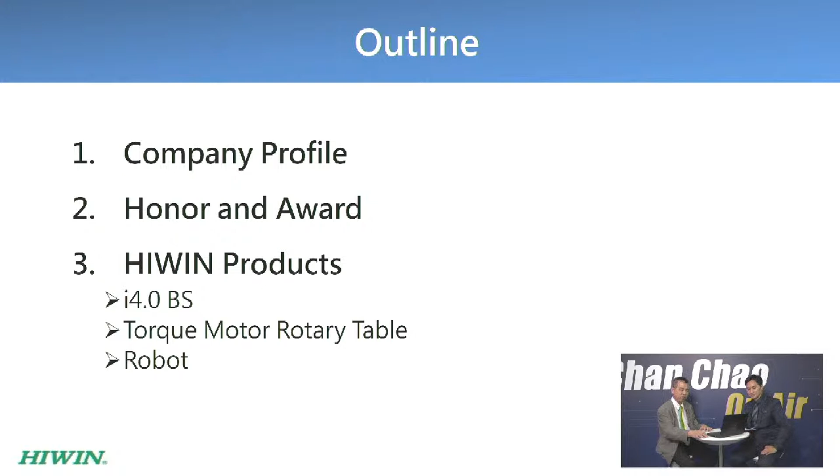I will focus on the product of HIWIN's Intelligent 4.0 ball screw, torque motor, rotating table, and the robot.

In the HIWIN Technology Group we have 5 companies: HIWIN Technology for mechanical components, HIWIN Microsystem manufacturing electrical components, Matrix - a more than 100-year-old company in the UK making grinding machines, Mega-Fabs in Israel which is the R&D center for microsystem products, and another company, Etherbright, which produces CIGS solar panels.

HIWIN is the motion control global leader for both ball screw and linear guideways, which are key components for intelligent automation and the robotic industry. HIWIN offers products from mechanical components to module products, such as robot reducers for robot applications, torque motor rotating tables, intelligent ball screws, i4.0 ball screws, for advanced machine tools and all kinds of industry, robot and automation.

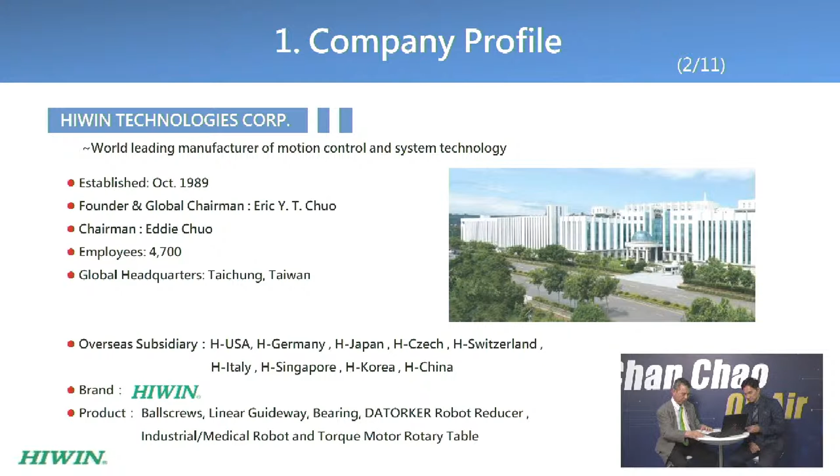Also for the semiconductor industry, which includes single-axis robot, 6-axis robot, SCARA robot, wafer robot, and delta robot. HIWIN is the best partner for Industry 4.0 in smart manufacturing.

Next, HIWIN Microsystem provides electrical component solutions. The main products consist of servo motor and drive, torque motors, linear actuators, position measuring systems, XY stages, and inverters. HIWIN is the only company in the world which can offer a mechanical and electrical total solution to global customers.

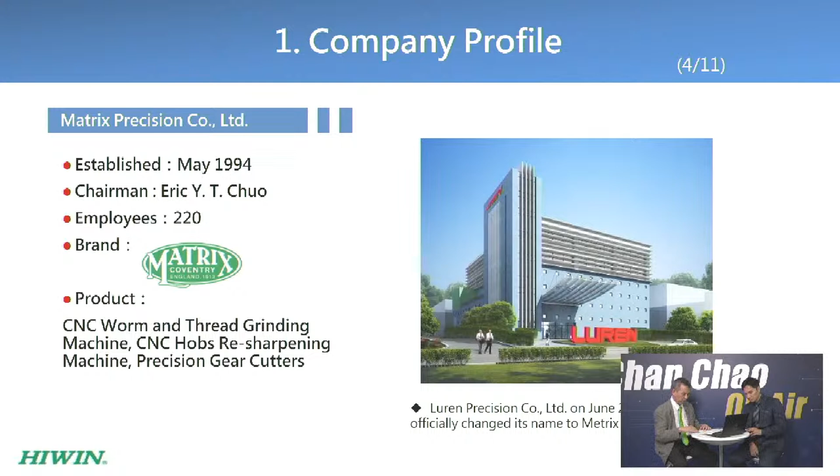Next is Matrix Precision in Taiwan, which produces CNC thread grinding machines. Next is Etherbright, which produces solar panels.

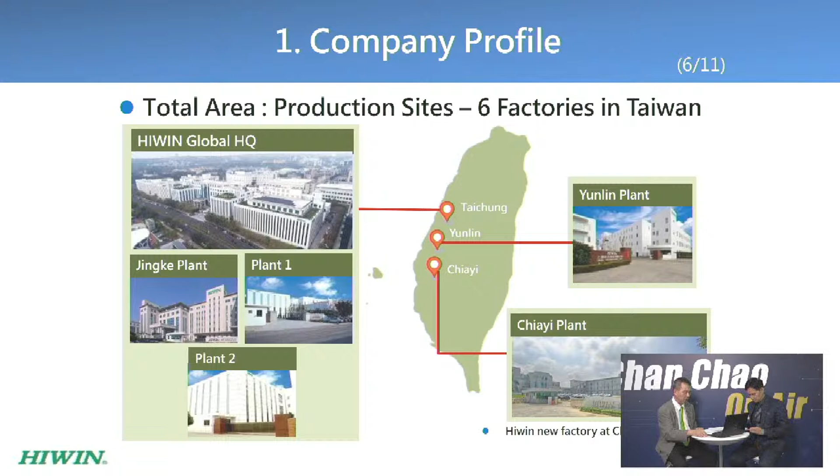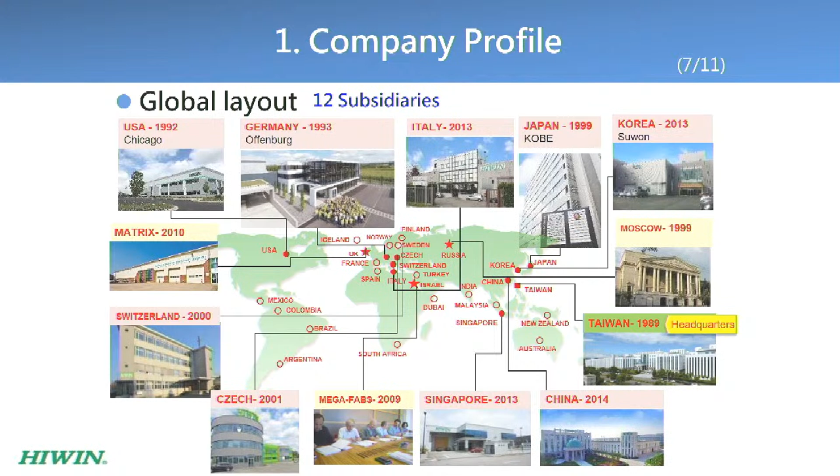All of HIWIN's factories are located in Taiwan. We have 6 factories and all key components are manufactured in Taiwan. HIWIN has a global network with 12 subsidiaries and distribution channels in more than 50 countries.

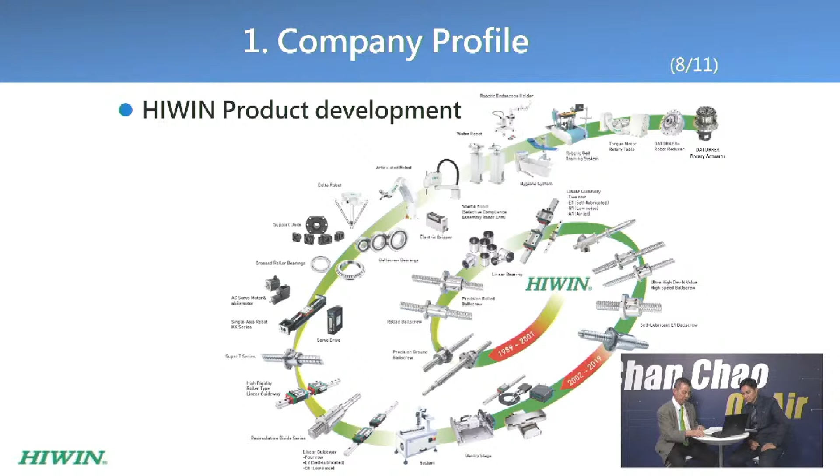Here is our product map. We started by manufacturing linear motion products, ball screws, and linear guideways. HIWIN manufactures all of its own key components. We provide integrated module products for the industry, automation, and smart manufacturing industries, such as industrial and medical robots and torque motor rotary tables.

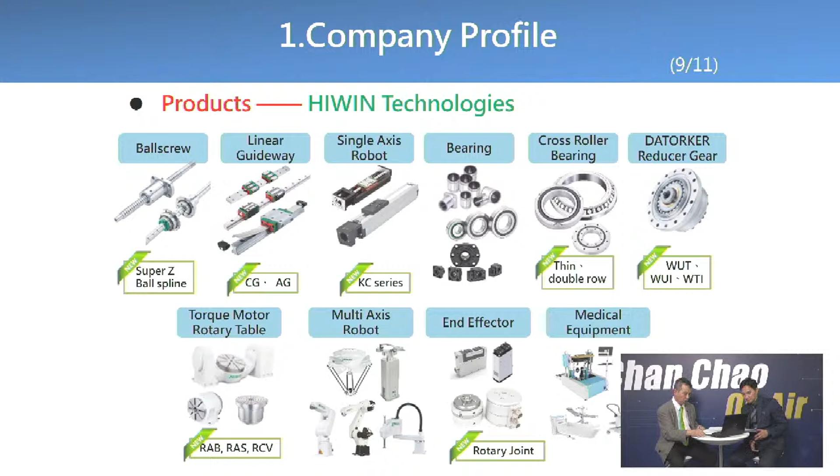Here you can see the full range of HIWIN's products, which include ball screw, linear guideway, single-axis robot, bearings, cross-roller bearings, gear reducers, torque motor rotary table, multi-axis robot, end effectors, and medical equipment.

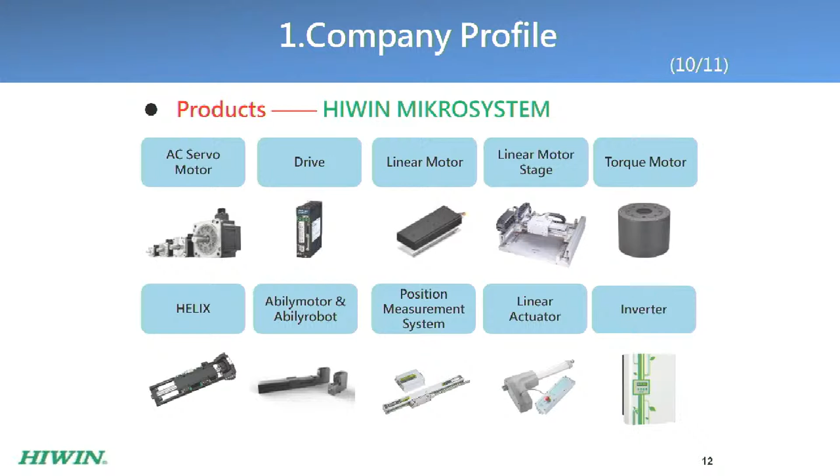Some of our best achievements include HIWIN being currently the global #2 in both ball screw and linear guideway production. We are also one of only 2 manufacturers in Asia for torque motors, and the only company that combines motion control components with electrical equipment to provide total solutions to our customers. HIWIN is also the largest semiconductor coordinate robot supplier and a top 3 semiconductor equipment manufacturer in the world.

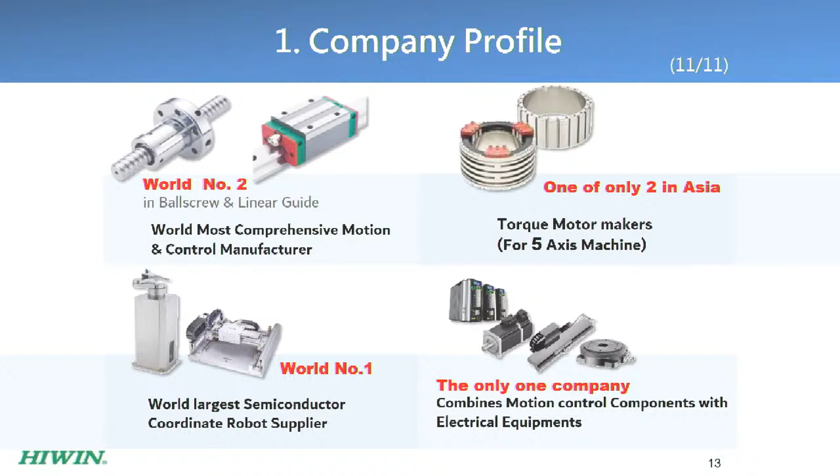HIWIN's outstanding performance has been recognized by the global media. We ranked #16 in Nikkei Business Asia 300 Power Performers in 2019, and HIWIN was also ranked in Forbes Asia 200 Best Under a Billion companies last year.

HIWIN has a constant focus on smart manufacturing. We have collaborated with universities in Taiwan and abroad to develop the next generation intelligent 4.0 ball screw.

With specially developed sensor and edge computing technology, the i4.0 ball screw can pre-diagnose the vibration, lubrication, temperature, and preload of a ball screw in precision machinery.

It is also capable of sending feedback to operators and managers via IoT, to computers or smartphones, to prevent unexpected machine shutdown, thereby improving productivity and reliability.

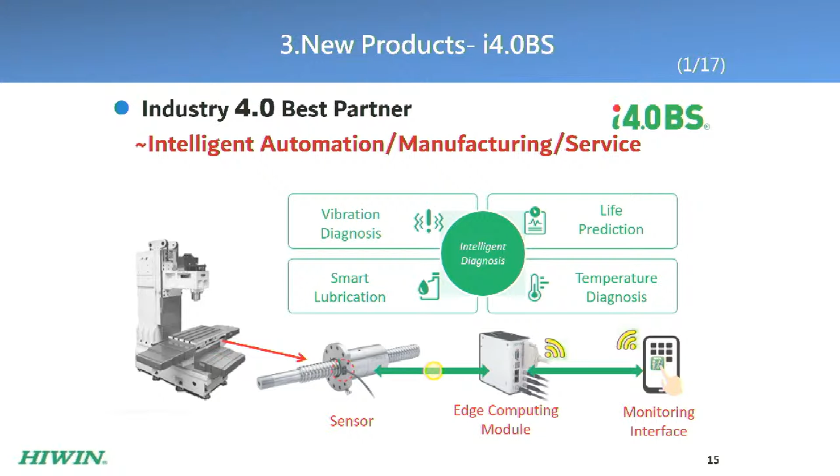Next, a video demonstration.

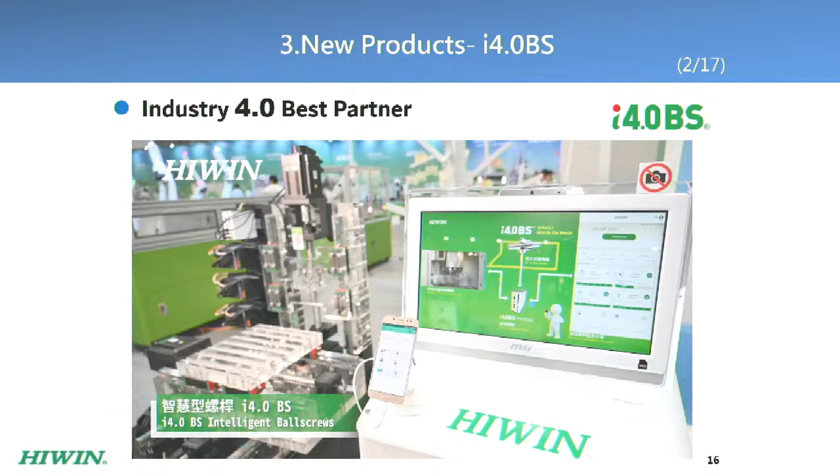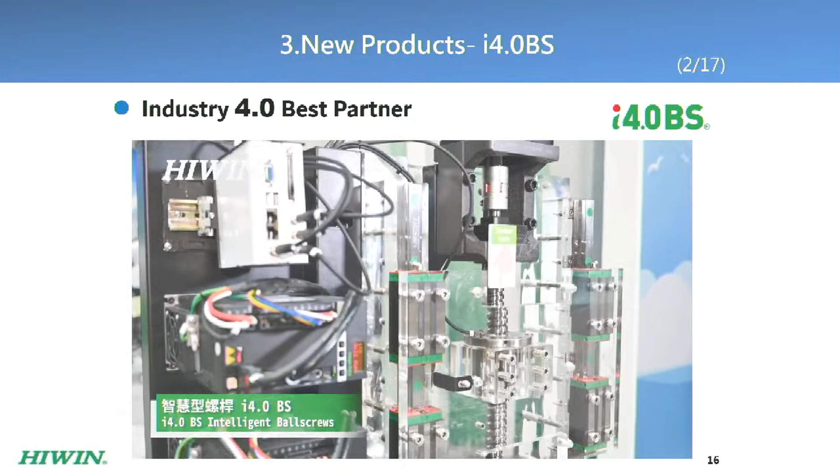The video demonstrates the intelligent 4.0 ball screw and the HMI interface, which monitors the full function of vibration, lubrication, temperature, and preload of a ball screw in advanced machinery.

Next, I will introduce some of HIWIN's total solution products, which are the core strengths and value added to our customers. As shown here, the KK total solution consists of the KK single-axis robot, coupling, servo motor, and drive. Customers receive total solutions for their automation.

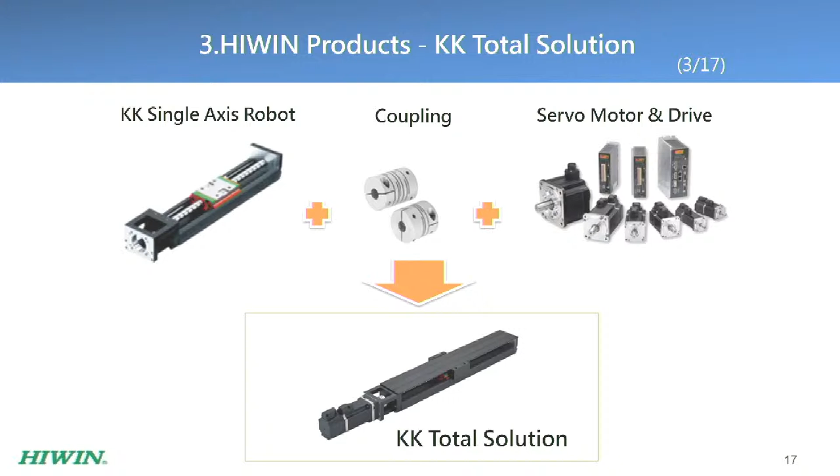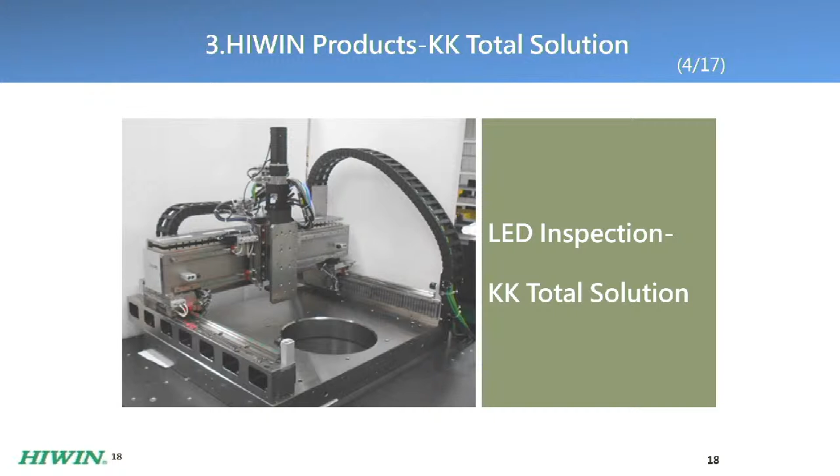They just need to plug and play instead of looking for different suppliers for different parts. Here we see LED inspection using HIWIN's KK total solution.

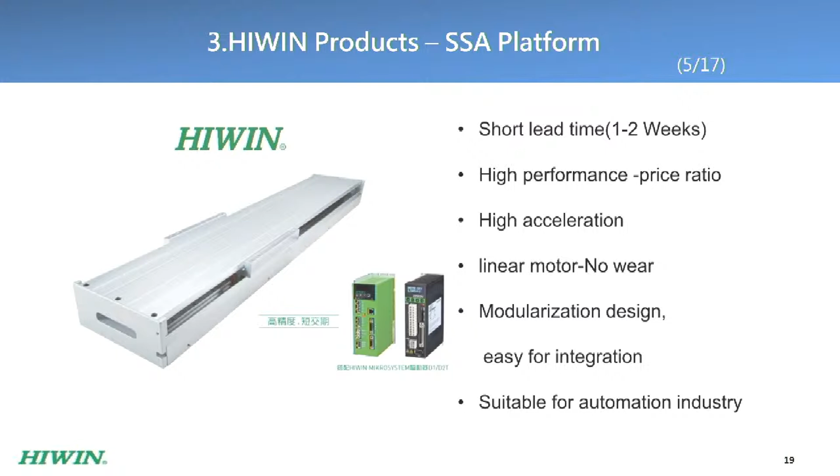This shows the SSA platform, a total solution stage using linear motor technology. It offers high speed and high accuracy for automation applications.

This is the torque motor rotary table, one of HIWIN's main products. Being one of only 2 manufacturers of torque motors in Asia, we have the advantage of in-house key components, technology, and know-how.

Therefore, we have the capability to offer top quality, value-added products to high-end customers.

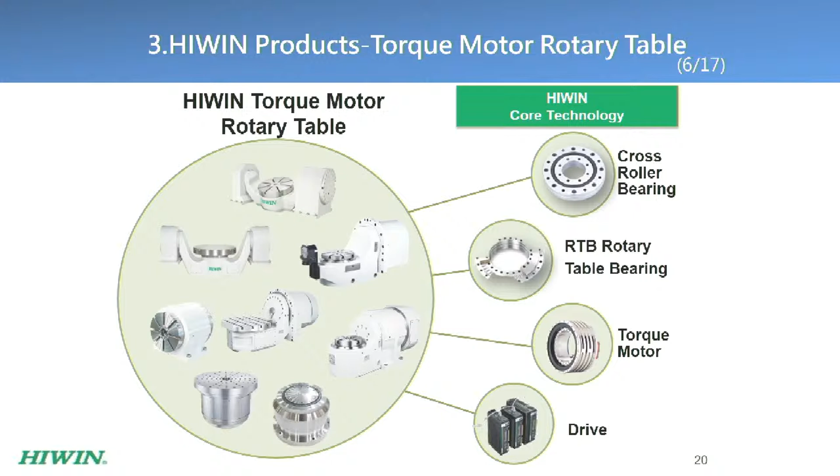HIWIN designs and manufactures all the key components, like the torque motor, cross-roller bearing, rotary table bearings, and the drive, for our torque motor rotary tables.

This is an example of a precision 5-axis machine using HIWIN's torque motor rotary table to produce turbines for automotive products.

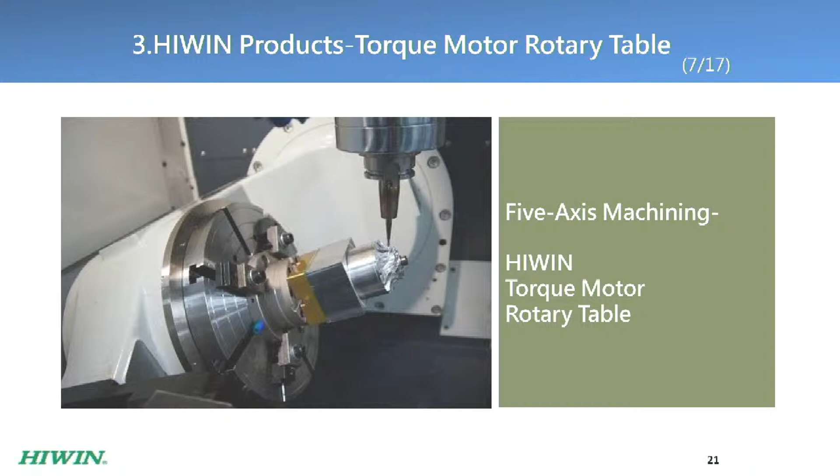The video demonstrates how the torque motor rotary table helps customers increase the machine's value-added function, upgrading them from 3-axis to 5-axis machines. This enables the production of more complicated and precise components by a single machine.

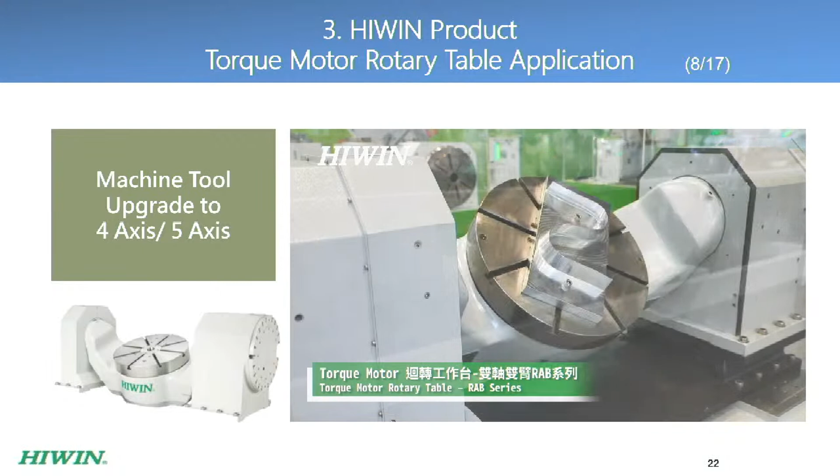Moving on to robots, HIWIN has a wide range, from articulated robots to SCARA robots for industrial applications, to delta robots used in the food and pharma industries, to wafer robots for the semiconductor industry.

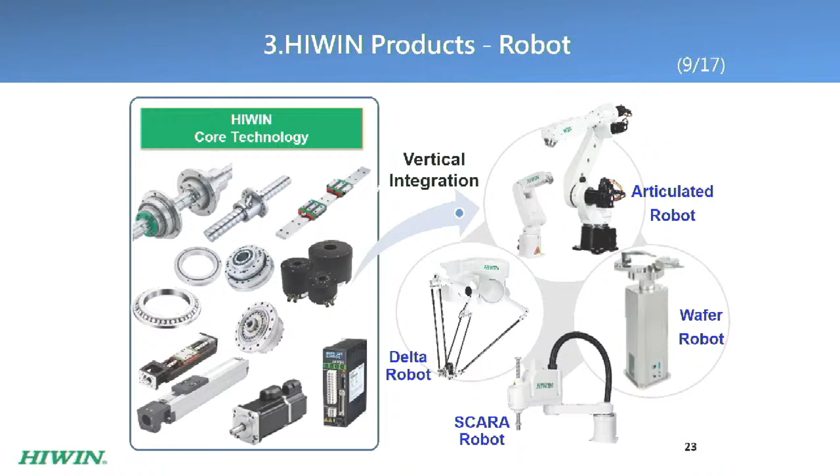This video shows HIWIN's delta robot and SCARA robot working together, installed for automatic labeling, pick and place, and inspection for the food industry.

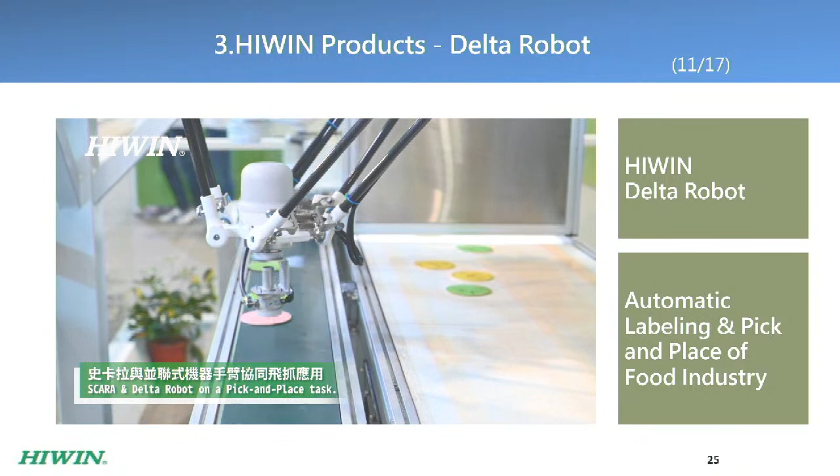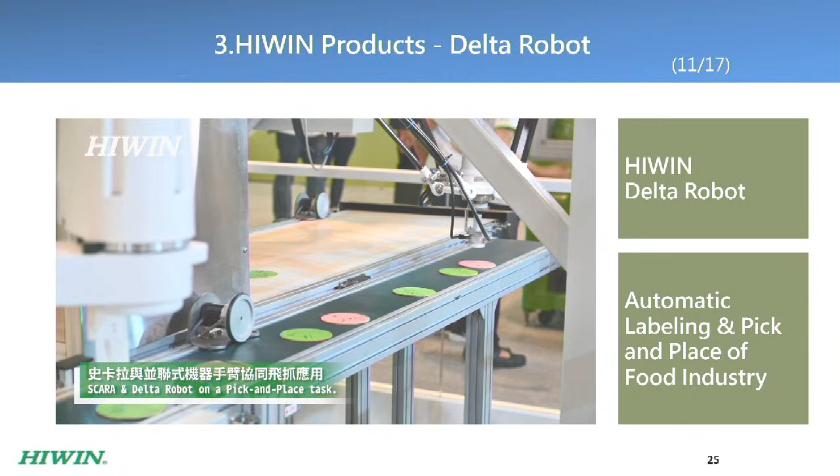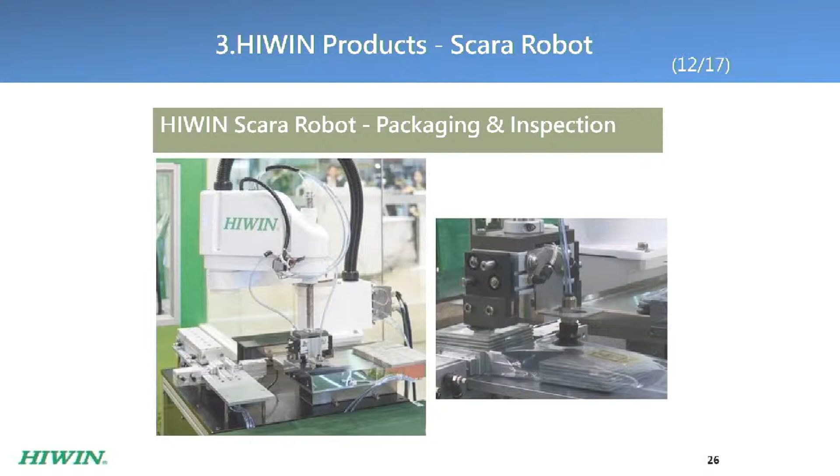HIWIN's SCARA robot for packaging and in-process inspection can be seen here. The next video shows HIWIN's wafer robot for semiconductor wafer handling processes.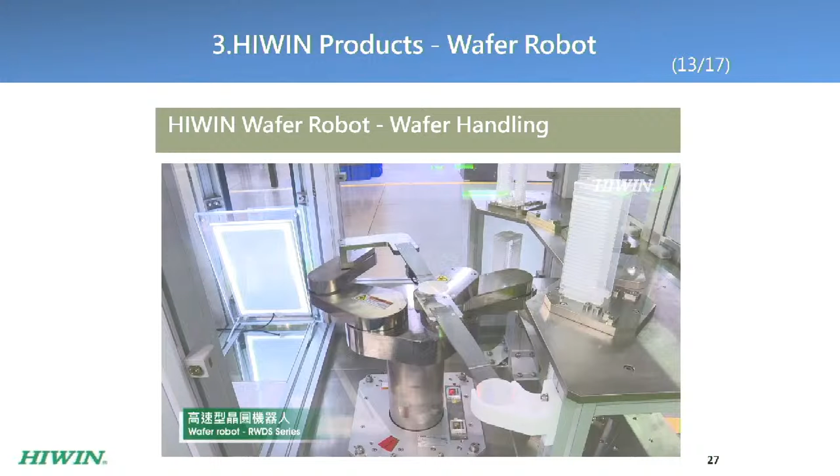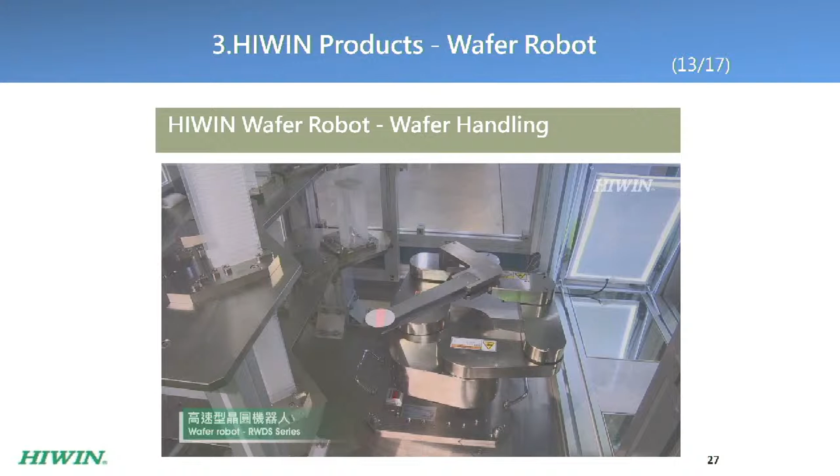This is HIWIN's latest total solution product, the DRA, Datorker Rotary Actuator. The Datorker is a high precision and compact gear reducer with a high reduction gear ratio, used in robots, high precision machinery, and indexing applications.

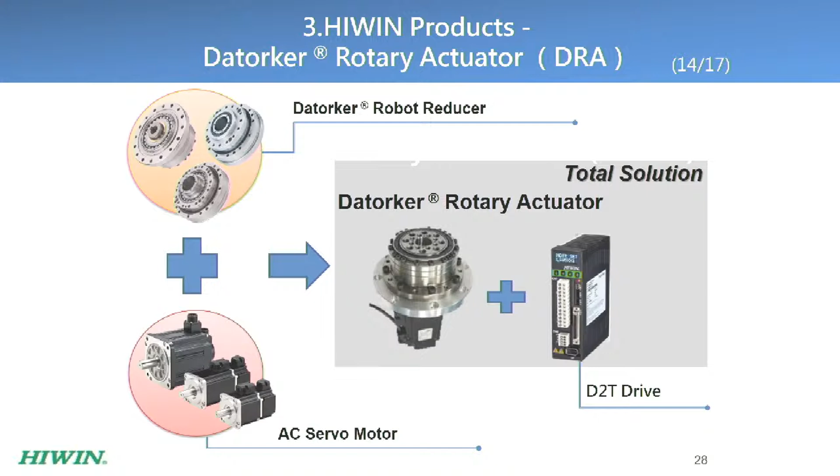Along with the servo motor and our D2T drive, we can offer customers an integrated precision product, which customers again just need to plug and play.

Here we can see the applications of our DRA for in-process inspection platforms and automation equipment.

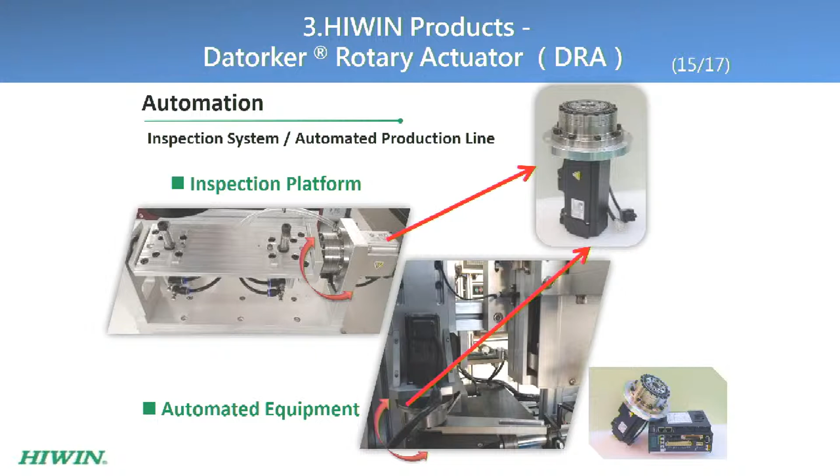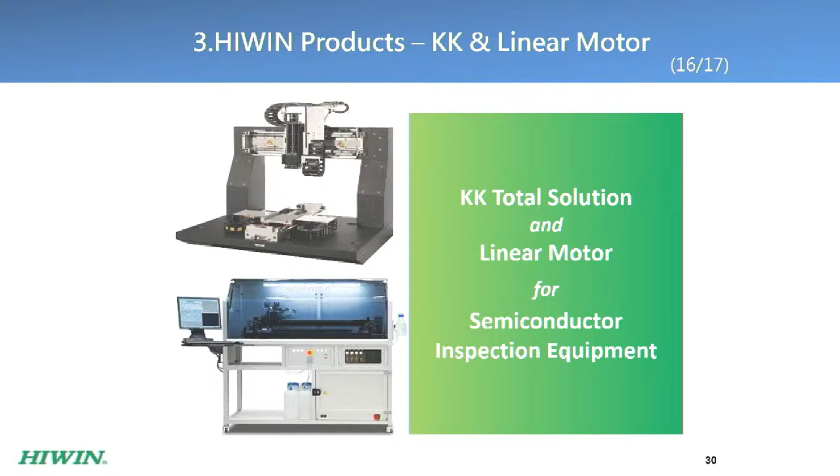Next, displays HIWIN's KK total solution with HIWIN's Mikrosystem linear motor installed in the semiconductor in-process inspection equipment. And the next, the application of HIWIN's KK total solution with HIWIN Mikrosystem air bearing stage for the semiconductor exposure machine is shown on this page.

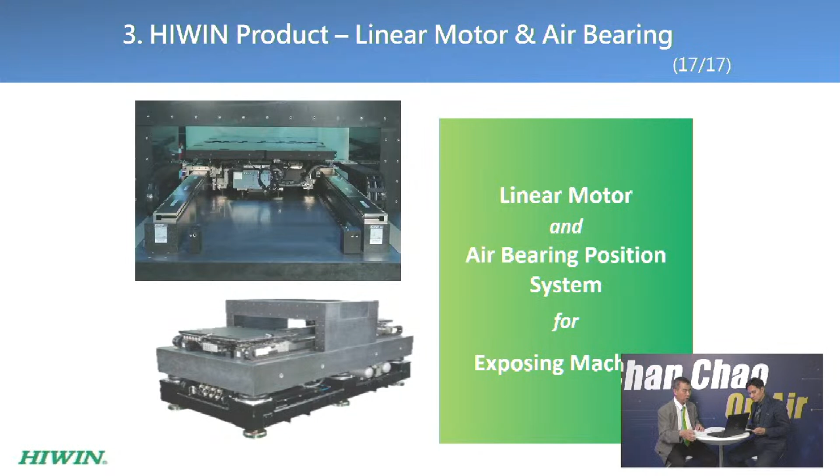So this concludes HIWIN's presentation today, and we would like to thank everyone who is attending this online presentation.

Thank you very much, Maurice, for this wonderful talk, covering the overview of the company and the whole product line introduction, specifically bringing 4 key products to our audience, including the i4.0 ball screw, torque motor rotary table, robot, and the DRA. Thank you. A very wonderful talk, and I saw the video with so much recognition and award in the world and in Taiwan. That was a phenomenon.

All right, now I have an extra question for the VP. In this first half of the year there's been the COVID-19 outbreak. So for the company HIWIN Technology, how do you deal with, how do you respond to this outbreak? Do you have any strategy?

The COVID-19 did create quite a big impact to some industries, but it is also an opportunity for HIWIN to offer value-added and high-precision products to automation and machine tool customers. As I presented today, with the torque motor rotating table, a lot of advanced machine tool customers have started to upgrade and install HIWIN's torque motor rotary table in 4-axis or 5-axis machines. Also, HIWIN's Intelligent 4.0 ball screw is being installed in customers' high-class machines for testing and production to achieve intelligent manufacturing. Under the COVID-19 pandemic, the market trend goes more diverse. HIWIN received really good orders from the medical, automation, 5G, and semiconductor industries, as all these applications need HIWIN's products.